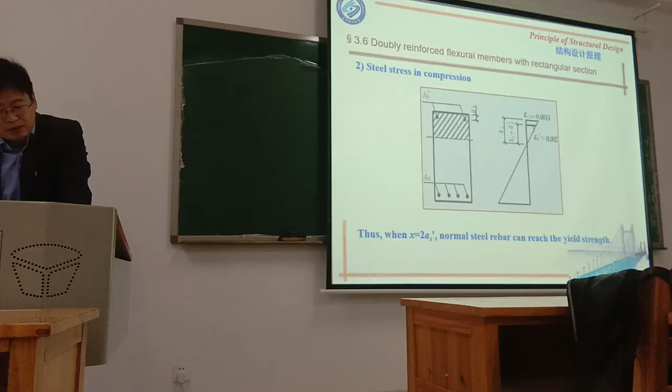This part is the double reinforcement. For the double reinforced member, the basic formula is similar to the single reinforced member. The only difference is we add this part, FSD prime, AS prime, and all inputs in these three equations.

We all found it with D, AS, or capital AS, or AS prime. Basically it is the same. As long as you remember this figure, the tension force is the same: FSD AS. FSD AS. So this figure is wrong, some symbol is a mistake.

So T is FSD AS. And for the compression force, we got two parts. One part is FCD BX, H0 minus half X. This is the same as single reinforcement.

Another part is borne by the reinforcement in the compression zone. This part is FSD prime AS prime, H0 minus AS prime. H0 minus AS prime is the arm for this compression force. The compression force borne by the reinforcement in the compression zone is FSD AS prime, this part, also FSD AS prime.

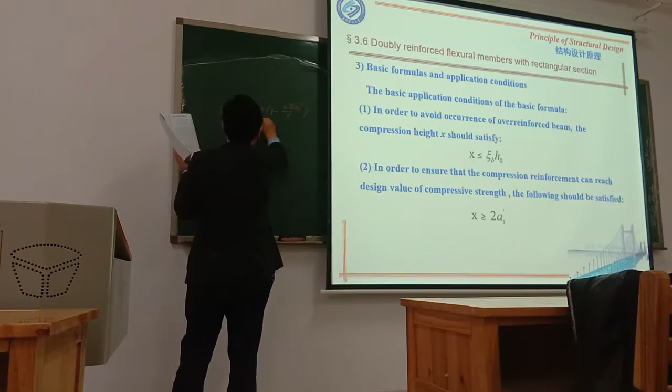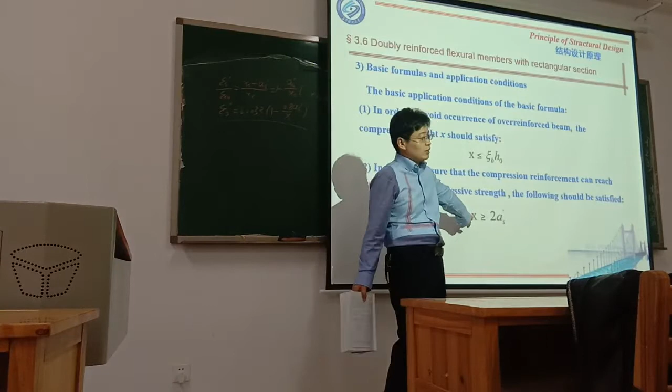So see this equation, and remember why we say x should be larger than 2 times AS prime. Why? Why do we say x should be larger than 2 times AS prime? Do you remember?

In order to make sure the compression reinforcement approximately reaches the yield strength, we need x larger than 2 times AS prime. So why x larger than 2 times AS prime? So that the reinforcement in the compression zone can reach the yield strength.

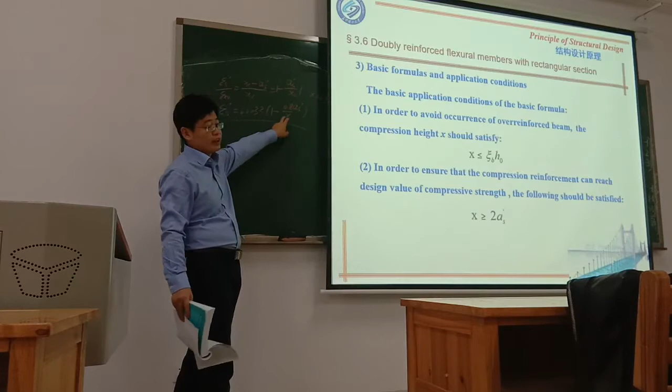The compression, from this figure, we use epsilon s equals 2 AS prime as prime, because maybe the compression hasn't reached yielding strength. So in this figure, if you replace x by 2 times AS prime, then finally you get the result. That's the reason why we say x should be larger than 2 times AS dash prime. Once x is larger than this, then the result of epsilon S prime will be larger than this one.

And also you should know the yield strain of the steel reinforcement is 0.002. Once this strain, the strain of the reinforcement in compression, reaches 0.002, that means the reinforcement reaches the yield strength. The yield strength, this strain is stress.

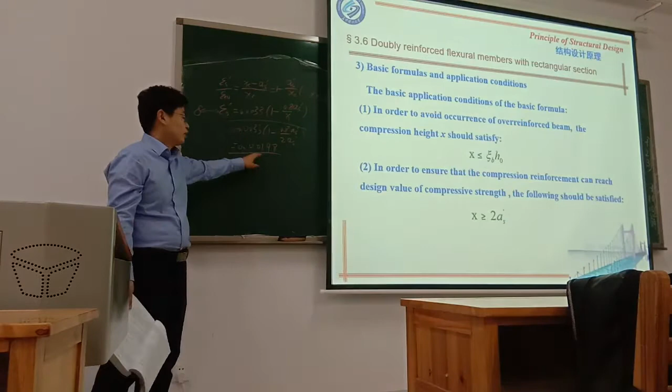When the yield strain is reached, then the stress and strain relationship holds. So when the strain reaches this level, that means the reinforcement reaches the yield strength. So that's why we require x larger than this, smaller than xi b H0 - the same as single reinforcement - and this one larger than 2 times AS dash prime, for the reinforcement in the compression zone, making sure it is fully used, reaching the yield strength.

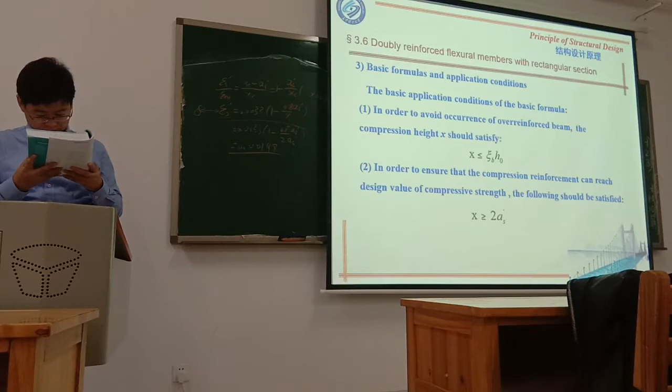So we see the calculation method in this picture. I think they give you the figure from the book, 6A, the calculation method. So for this double reinforcement beam,

normally we also have two cases we need to discuss, as shown in figure 3-27. In this case, we are asked to solve for the tension reinforcement AS and the compression reinforcement AS prime.

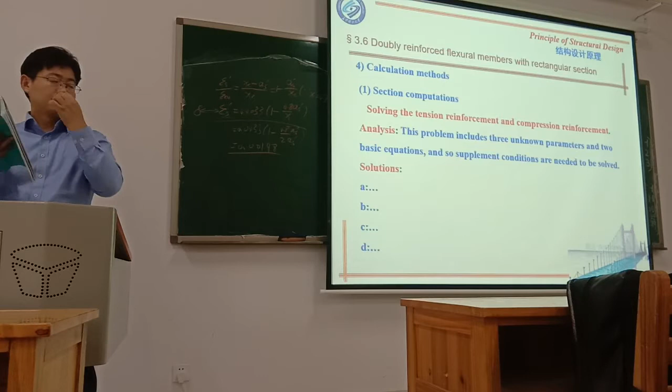Which page was it, 6A? 6A. So for the calculation of this double reinforcement beam, you see this, 6A. So in this question, we need to calculate the tension reinforcement AS and the compression reinforcement AS prime. That means both reinforcements are unknown.

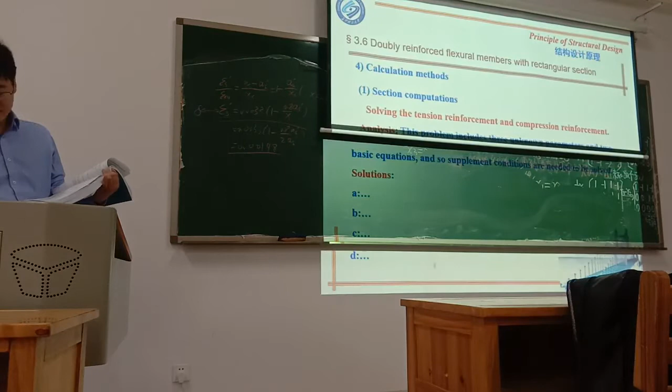Hey, maybe we can just turn it on. Yes, you're right, but it doesn't matter. That's good. Okay, we see this.

So for this case, double reinforcement beam, it asks you to calculate AS and AS prime. Of course, it tells you the moment and the dimension. So it just asks you to design how much we should put inside. So how to do this question? Let's see the solution.

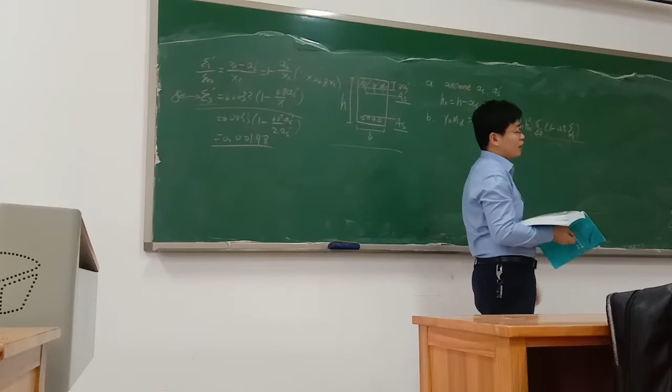Yeah, so this fcd bx, fcd bx plus, so mu equals this. This equation is the basic equation for the single reinforcement beam.

And we use the boundary condition, the boundary height x equal to ξb h0. Then, using this equation with the boundary condition, we get the largest resist moment of the single reinforcement beam. If this moment is still smaller than the moment induced by the load, that means the single reinforcement beam is not strong enough.

We have to use a double reinforcement beam. So this is step B. Step C: you see in the book, they say we make AS plus AS prime more economical, because you have many choices. You have to find the more economical choice. How do we make this more economical?

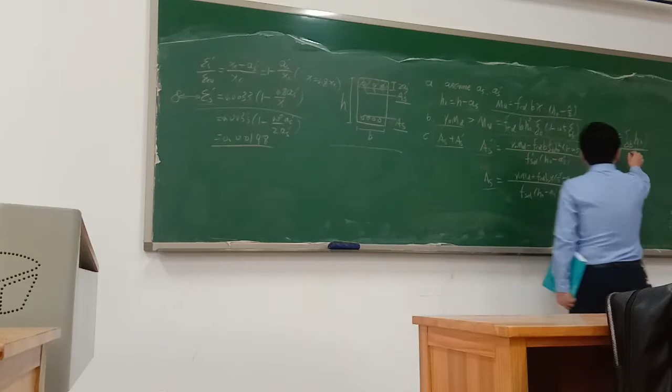If AS becomes big, meaning AS prime will be smaller. If AS is big, meaning AS prime will be small. Yeah, if we use x equal to ξb h0, this result AS prime is the most economical result, and it means the tensile reinforcement has been fully used.

And can you see how we got this? Why can we write the equation like this? Just see the basic equation 3 dash, 3 to 23a.

Six seven page. The equation is 3 to 23a, 3 to 23b. Say AS prime and AS, because in this equation we just replace x by ξb h0. Then you can get the result AS prime and AS. So that's why we got this equation. So till here we have calculated the AS and the AS prime.

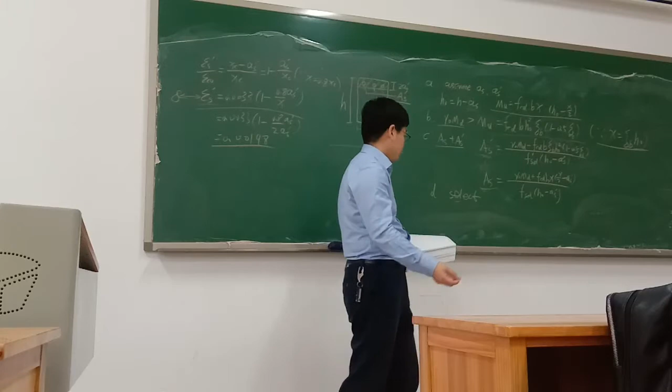Select the diameter and the number for the steel bar. Then, as you have determined which part of the steel, you draw the arrangement. So 1 layer or 2 layers. Well, after this, we go to the next step: check.

This part is the calculation, so this question. After you have determined how to arrange your reinforcement, then you need to check if this design is okay or not. Because in this calculation, you assume some value, and this result is the theoretical result.

Once you have determined the diameter and number of the steel bar used, then you will go to the real AS, X, A prime, and this area of the reinforcement. Then you need to use this real value to check the construction requirement and the moment, the resistor moment, MU.

If MU is larger than gamma 0 MD, if this is satisfied, that means your design is okay. And otherwise, you need to go back and change the value and calculate again.

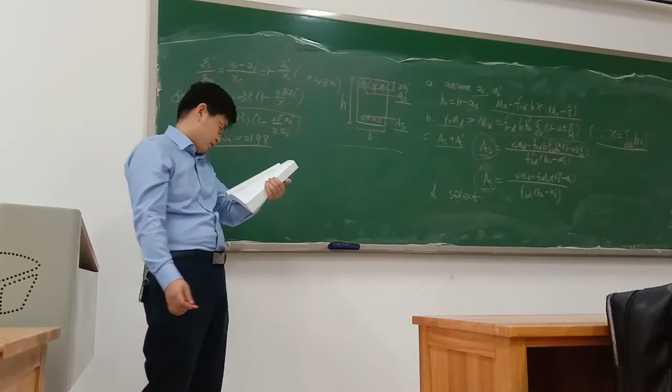At this situation, you just assume AS, and then for the basic formula, say x, you can calculate x equal to h0 minus this. Check if x is smaller than ξb h0. If satisfied, good; if not satisfied, you need to modify the design. So this solution is easy.

So meaning 69 page, to see this equation. 69 is for this situation. Everything I told you includes AS prime, only asking you to calculate AS. Yeah, so how to calculate it? It's a little bit different from this situation.

At this situation, AS prime and AS, you also need to solve. These two you don't know. And this solution can give you AS prime. So what's the difference? The step is different.

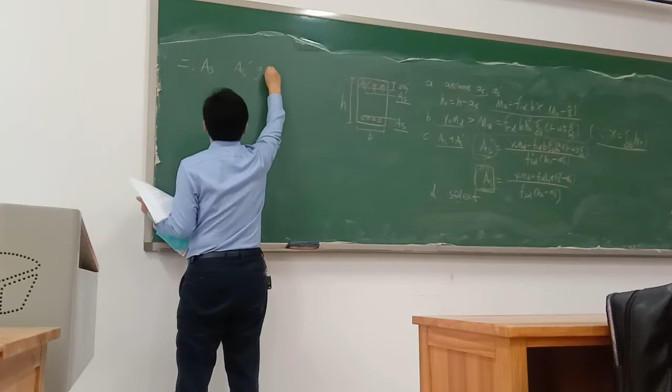So this result—do you know how we got this result? Then from this one.

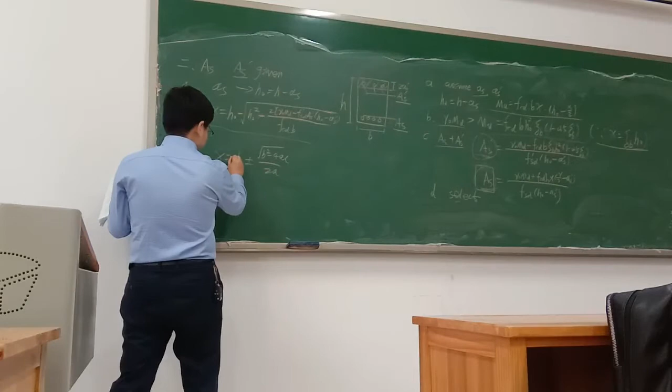Is this minus b? Is it? Yes, minus b, I remember it's minus b.

When you check this, it's a little bit mixed. So this is the result, this is the condition. Give you as prime, ask you to calculate as.

First step, assume as got h0. Second step, use the basic formulation to get x. Once you get x, then we check if x smaller than ξb h0.

If this is not satisfied, that means your design is over-reinforced. It's not good. You need to modify the design.

And then let's see if x satisfy this, then we can get AS, use the basic equation, the first equation.

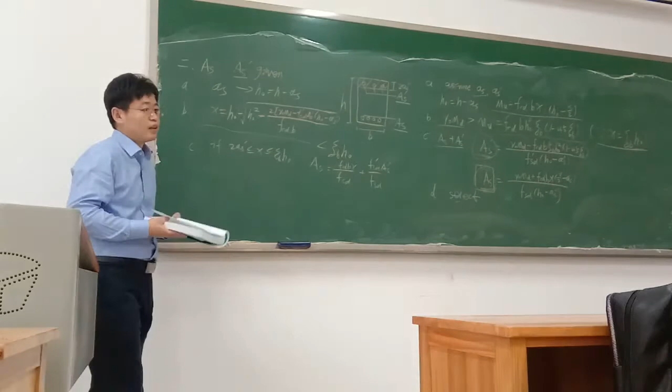Use the first equation, 3 to 22. And there is minus b.

The quadratic equation, wait a minute. The quadratic equation, it is minus b. X equal to minus b, minus b plus... No, the quadratic equation, you were asking whether maybe there is minus. You just let us remove them. Yes, it's minus.

Okay, anyway, you know how we got this result. Let's use the basic equation.

And then once we check x smaller than ξb h0, then the first step, let's see, we use the basic equation to get AS.

So no problem with this, it's easy. When will be given the AS prime and we have to calculate AS, right? Yeah.

So in this situation, AS prime and AS we all know, then both AS and AS prime we need to assume. And in this situation, AS prime given, we only need to assume AS.

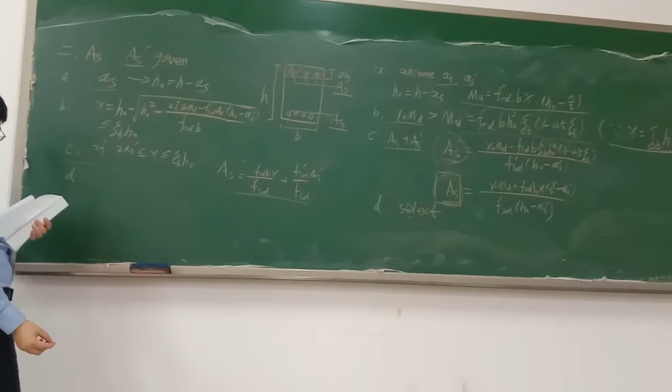And then step D, another situation, if x smaller than 2 AS dash, so x smaller than 2 times AS prime, what does that mean? We ask for x larger than 2 times AS prime. If x is smaller than this, what's this meaning? What's the meaning?

Yes, this is the realistic case, that's our problem. So that means the reinforcement in the compression zone has not reached yield strength. The function has not been fully used. Yeah, so at this situation...

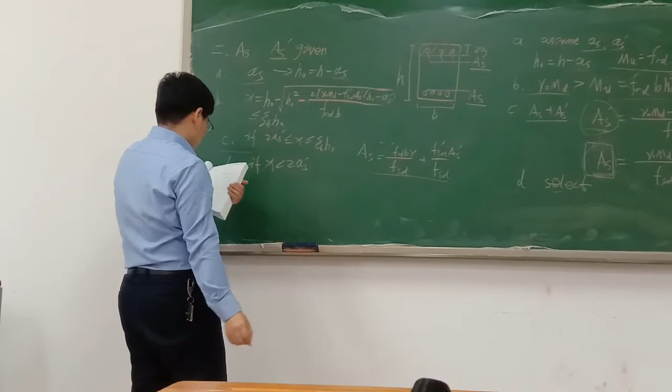We need to calculate the AS. If x is smaller than this value, we normally use x equal to 2 times AS prime, and then by this value we can get AS equal to gamma 0 Md divided by fsd, h0 minus AS prime.

AS equal to this line. You know what, from the formula. Which formula we use?

3, yeah, 3 to 23. Yes. A or B? A or B? No, no, A, A. You sure it's A? Yes, yes.

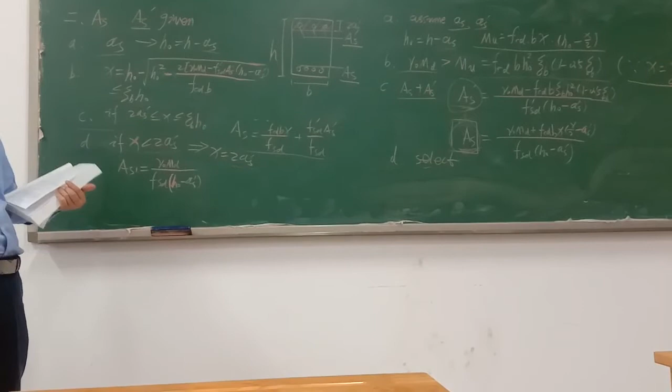Of course it's not, because the second one is 2 AS prime. So of course we use 3 to 23B. Yes, because we use this, then the first part becomes 0. Half x minus AS dash equal to 0. Then we got this.

And another step, we calculate for the single reinforcement section, AS dash is not considered in the equation. So that means taking AS prime equal to 0. Then we got another AS equal to...

FSD, FCD, BX. Then we compare this, we use the minimum value of AS1, AS2.

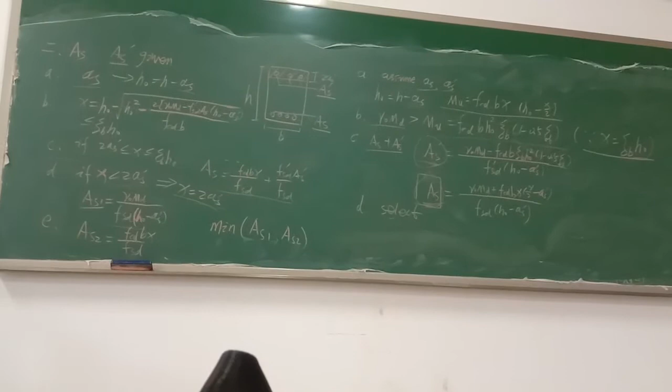The following part is to check your design. So the first part is to check section check. Section check, okay.

So the main purpose is to calculate MU, the resisting moment, resist loading capacity, to check MU if MU is larger than gamma 0 MD. So once you finish your design, you determine the diameter of reinforcement and the number of reinforcement, then you can calculate the real resistance force, MU.

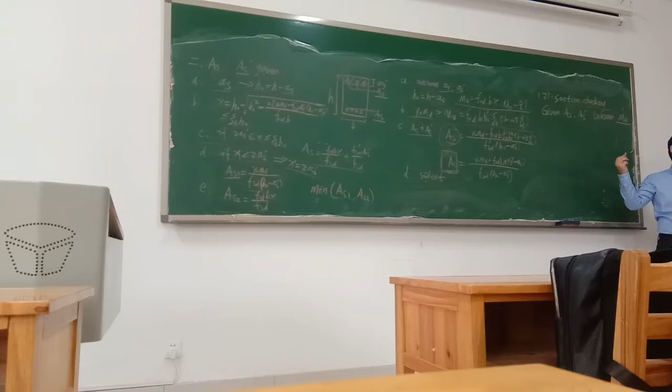So now we need to check if MU satisfies the requirement or not. So this way you check AS and AS prime, you'll also use this equation. You can just use the basic equation to calculate MU directly. But for this...

So in our book, it tells you how to do it. If x smaller than, if x smaller than 2 times AS prime, that means the reinforcement in compression has not reached the yield strength. So at this situation, we just make it simple.

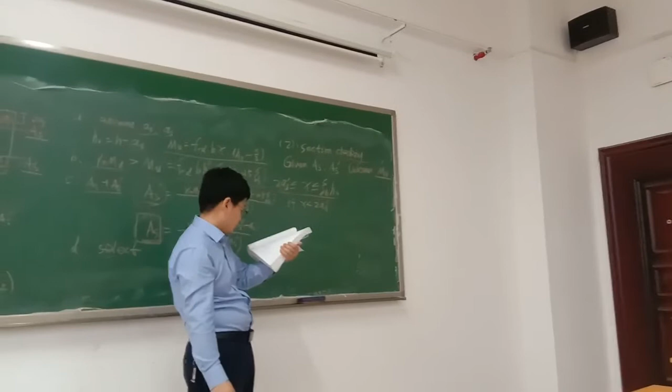So how we got this mu? I find it, we take it from the formula 3.

To 23p, yeah, 3-23B. We just use x equal to 2 times as dash. Then the formula, the first part is equal to 0. Then we can go to mu.

So if x is smaller than this, then we can use the maximum value 2 times as. So the result is, because it is smaller than this value, this mu, this value will be the largest, the maximum resistant force of this condition.

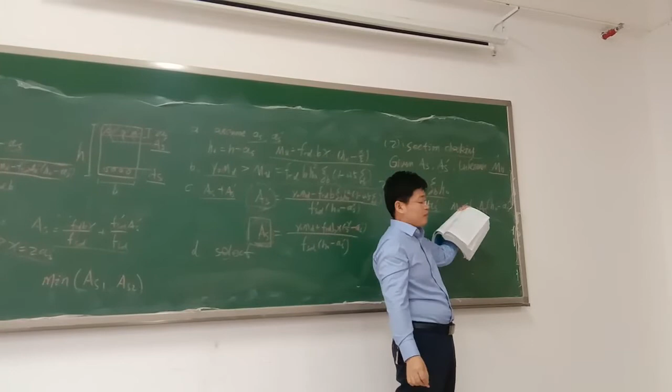Normally, for this condition, mu should be smaller than this actually. Then we use this boundary condition. This mu is the maximum value for this condition can get.

Any question for this?

So another situation, if x larger than the ξb h0, that means your design is over reinforcement. So for over reinforcement, how we calculate? One selection is to change your design, to make your design appropriate reinforcement.

Another selection is just calculate the mu, use x equal to ξb h0. Understand?

If x large, that means it is over reinforcement. Some of the reinforcement are not fully used. It cannot reach the yield strength.

Then we use this value x using boundary condition where we calculate this force.

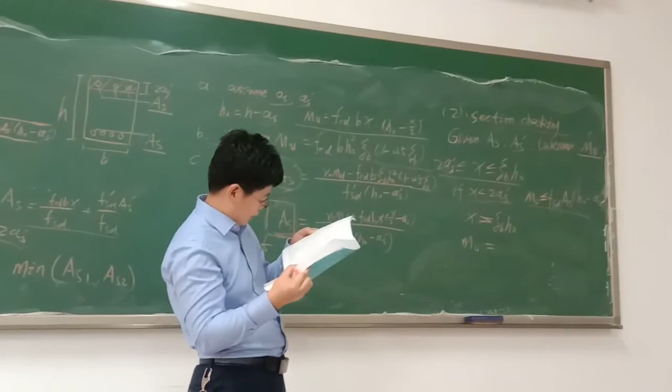They didn't. They just said you use the basic formula. Oh yeah, you in the second page, the 5 step.

And for this condition, actually, your book tells another part. Once we got this, and also we use the singly reinforced rectangular section calculation the MU. This we call MU1 and MU2.

Use fcd b x h0 minus x. This is the MU calculated by the single reinforcement beam.

Suppose this beam is a single reinforcement. Don't care about the reinforcement. Don't care about this. Just use As to calculation. Then compare these two. Take the largest one. And max, use the max.

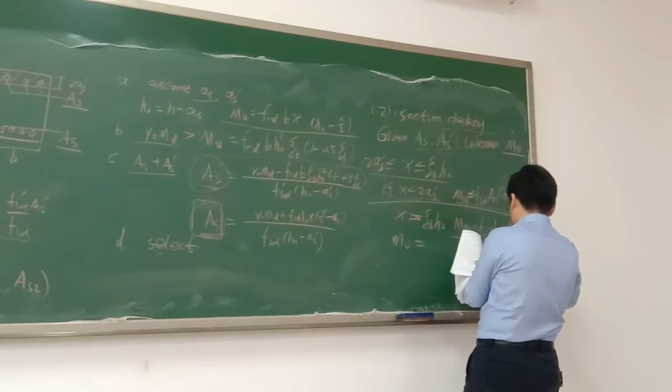So this part is the section check of the double reinforcement beam. That means once you got this As, As prime, we need to check this design if it's okay or not. That means we need to calculate MU to resist force.

If this resist force is larger than the external force, then for the best situation, x in this range, then we can use the formula basic equation directly to calculate MU.

If x smaller than 2 times AS prime, then we can use x equal to 2 times as prime, got this MU1, and then we use the single reinforcement beam equation. We can get this MU2 and compare these two, we can take the larger one.

And for the situation x larger than ξb h0, it is over reinforcement beam, then we just take x equal to ξb h0, use the basic equation to calculate MU. Or another choice, you change your design to make its x smaller than the ξb h0.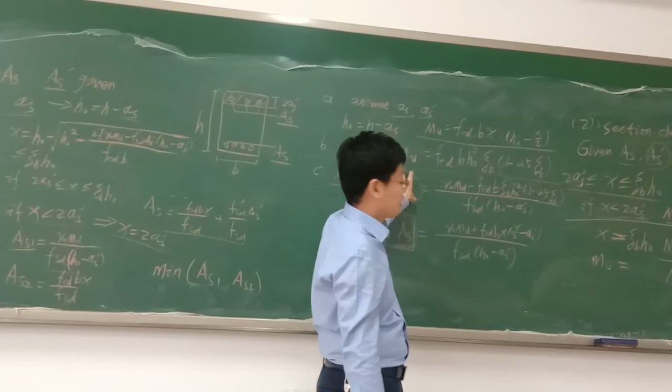And for this situation, AS prime I give to you and ask you to calculate AS. We also like this, assume AS. Assume AS, we got H0. Once you got H0, you can use the basic equation, the product equation, to get this result x.

And then, based on the value x, if x satisfies this condition, you just use the basic equation to get AS. If x is smaller than this, we got two values and then use the minimum value. Say if x is smaller, normally we use x equal to this one. Okay, this is for the double reinforcement beam. We calculated this one, this two, we got this minimum AS.

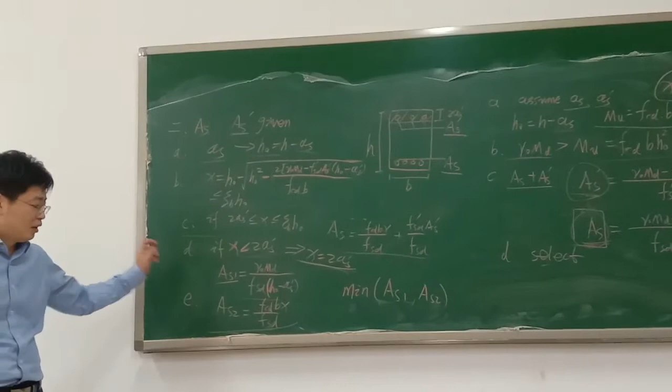And also for this situation, we can find if x is larger than this one, that means it's an over-reinforcement. Actually, normally you need to change your design. Or we use this, same thing, use this x equal to ξb h0 to calculation. But it's new - normally, if you find x is larger than ξb h0, that means your design is not good. You better go back and change your size, change the material, something like that to make x smaller than ξb h0.

So this is the basic equation. Now if you close your eyes and think about this condition, for this solution asks you to calculate AS and AS prime. So think about how to do it step by step. And for this solution, think one by one step. Can you just remember, if you don't see this, can you remember how to do this?

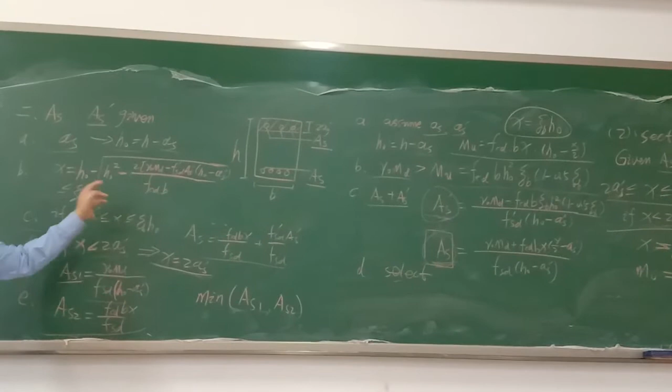Yeah, a bit. Now see, this one is when we don't know AS and AS prime. But this one is when we know AS prime, and we don't know AS. It's different, you see. In this we calculate x. In this we calculate mu. So that's the difference.

So now we remember it. Okay, I give you some homework.

He has already taken it. He'll put it inside the group. Okay, is your job.

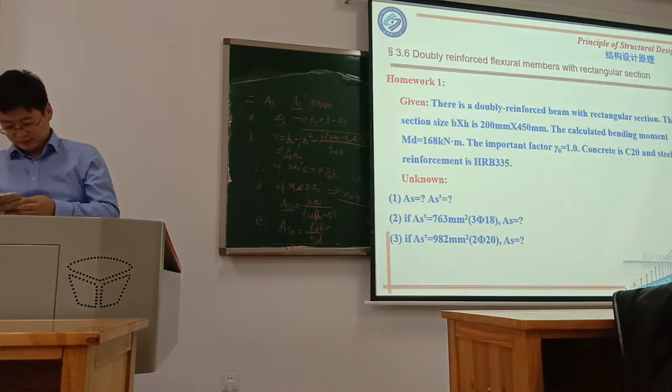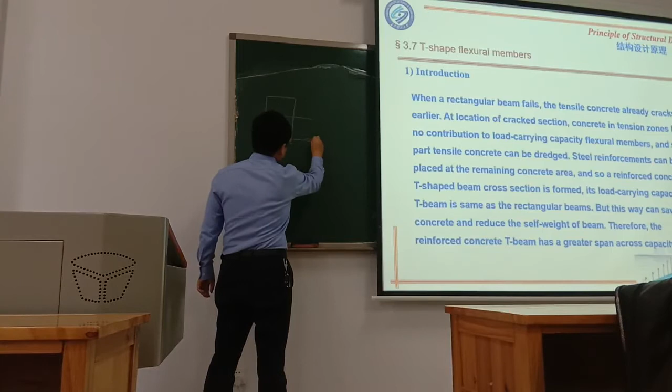For this rectangular beam, once the concrete cracks, actually this hard concrete is no longer used. The force we see, we just transfer to this reinforcement. So this hard concrete actually is of no use for the load carrying capacity. Then we try to remove it just like this, something like this. Then generally we get this T shape. Of course, as you go up, make this T more, because when the force increases, the compression area becomes smaller, something like this.

Then, compared with the rectangular shape, we just remove this part and put the reinforcement in the bottom. So the rib of this T beam, the main function is just to place the reinforcement. And the upper part, of course, is to resist the compression force. So from the rectangular shape to T beam shape, the resistance or the load carrying capacity actually has no change.

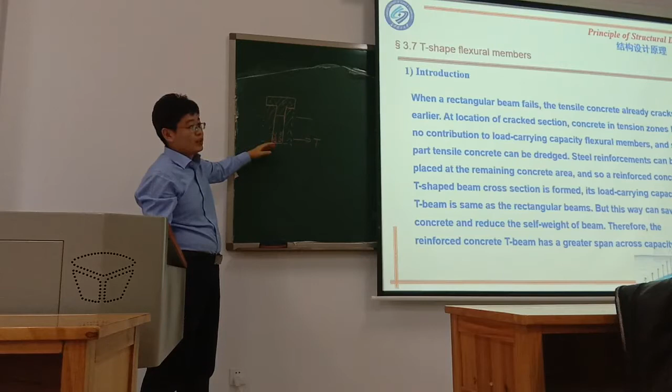Because the compression area is the same as the rectangular shape, and the reinforcement is the same. But we removed a lot of the concrete. That means the self-weight of the beam has been reduced greatly. Then the self-weight has been reduced, that means we can make the span longer, because we know normally nearly 90% of the loading capacity is used to resist the self-weight. If self-weight was reduced greatly, of course the span can be made longer. So that's why actually T-shape beam comes from rectangular shape. That's based on this load distribution, tensile force and compression force.

So for the normal T-shape, the tensile force is resisted by the reinforcement. The compression force is resisted by this part. Sometimes it's resisted only by this flange part, or sometimes it's plus the rib, part of the rib.

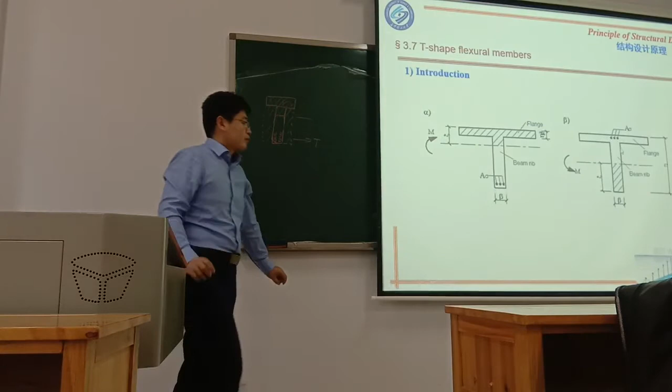And this is the inverse. The top is in tension and the bottom is in compression. This situation actually is just like the rectangular shape. No matter if the shape looks like T, suppose at the middle point of the continuous beam, the beam is bearing negative moment. The up part is in tension, the lower part is in compression.

If you use this T-shaped beam, then the up part is in tension. The tension force is resisted by the reinforcement, and the lower part is in compression. The rib is bearing the compression force.

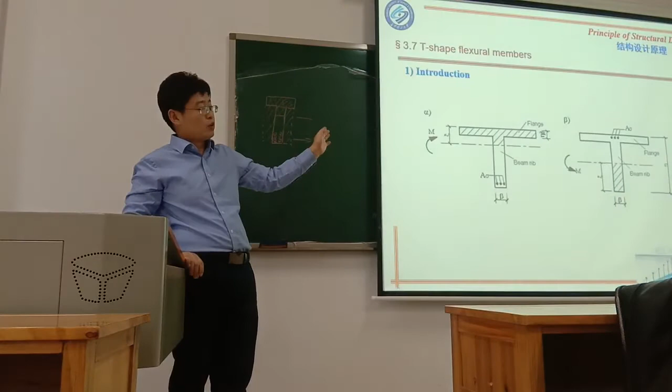Actually, this flange, once the crack occurred, the concrete of this part - we just neglect the tensile force borne by the concrete. It's very small, and we treat it as all the tensile force transferred to this reinforcement. So for this solution, actually it's just like a rectangular beam. No matter if it looks like a T-shape or not, it actually works as rectangular.

So for this solution, it's just like this. If we don't consider this part, this flange has no use actually for this situation. It just works like this rectangular shape. So also it looks like T shape, actually it works like the rectangular. The formulation is similar.

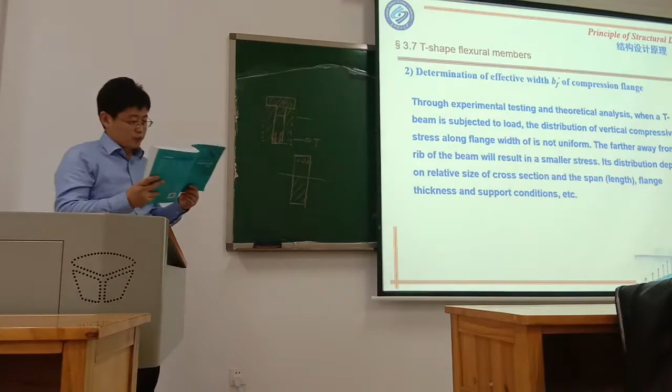So in your book, there's some content introduced about the equivalent shape, equivalent change of this shape. But this is very rarely used. Maybe we just introduce it a little bit since your book has talked about this. So in our book, we introduce this shape: plate with an empty hole.

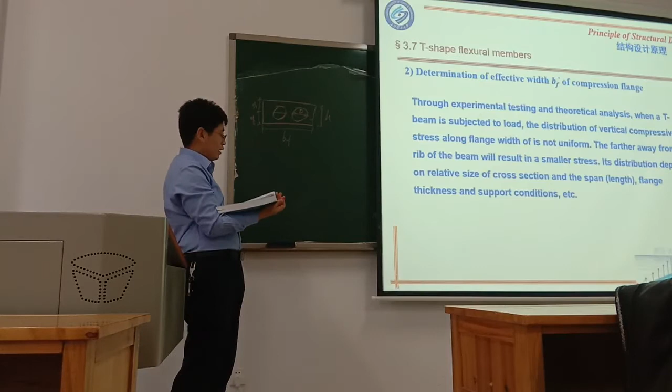So for this type of beam, this section is rectangular with two holes inside. It's not easy to calculate the force. So we try to think to make an equivalent shape. In our book, they make this equivalent, and finally they make this something like an I shape. So from this rectangle, the hollow, two hollow circles, and then to this shape, and to this shape - we call this equivalent. So how to make this equivalent cross section? Because this time it's easy calculation, but this one with the circle is a little bit complicated.

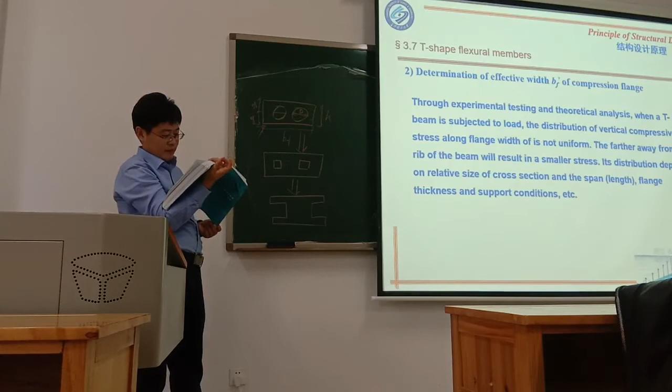So in order to use this section to replace this section, they make sure the area of this hole is the same, and the moment of inertia is the same. The equivalent area and the equivalent moment of inertia. Besides this,

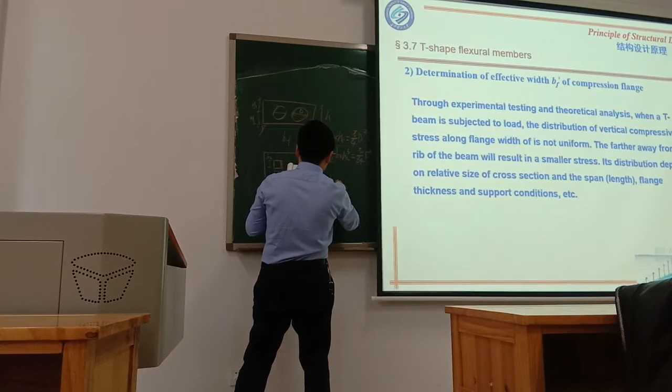So by these two formulas, we got this: HK equal to, BK equal to, then finally I got this. So the basic principle is if the area is the same and the moment of inertia is the same, then we can change this section to this section.

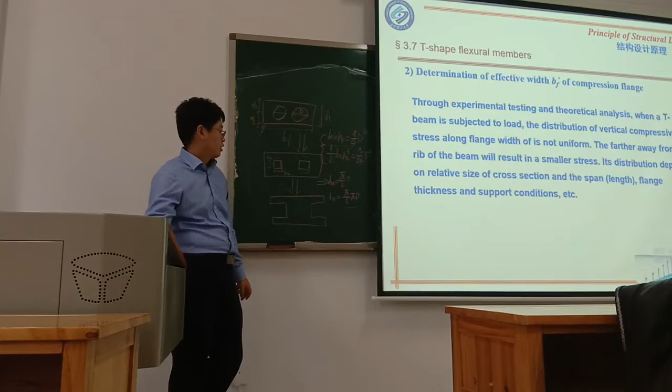This area was like BK HK equal to the area of this circle. And this moment of inertia, this formulation, for this rectangular shape or square shape, the moment of inertia - this equation is one big equation in your material mechanics.

So this was a small part in the content of your book. It just introduces the equivalent section, how to calculate the equivalent section.

So why do we transfer this section to this section? Because for this section, the calculation we can use the T shape or rectangle shape equation to calculate the loading capacity, the moment of mass. But for this, it's a little bit difficult - it's circle. So for the height or for the effective height, H0 or AS, it's very difficult to calculate. It's not uniform. So for this shape, it's uniform distribution. So we can use this shape to calculate the loading capacity for this - use this equivalent shape to calculate this part.

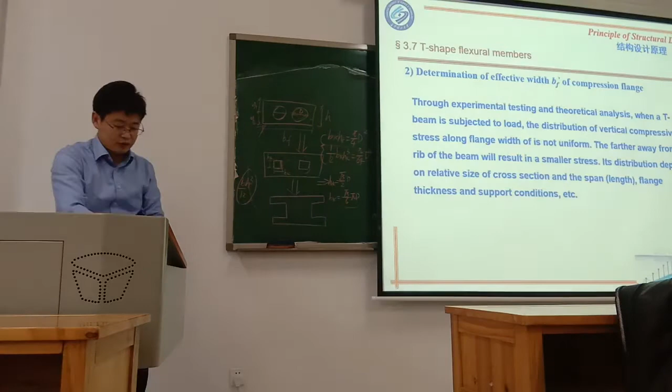So that's why we use this equivalent section for this circle section. So another content in our book is the determination of the effective width BF prime for the compression flange. So why do we introduce this? Because for the real situation, for this T-beam, the up part is in compression, but the real distribution of the compression actually is like this.

So that means the compression stress is not uniform along this flange. So if you want to calculate the real compression force, it's not a little bit difficult, it's very difficult. Just like this.

For the rectangle shape, we see the real distribution is like a circle. But for this flange, in the y direction, the distribution is also near the rib. The compression force is larger there. Going toward the edge of the flange, the compression force generally decreases. Imagine it's T-shaped, and if you bend it, at the side the force is smaller, in the middle the force is larger. So it's not a uniform distribution.

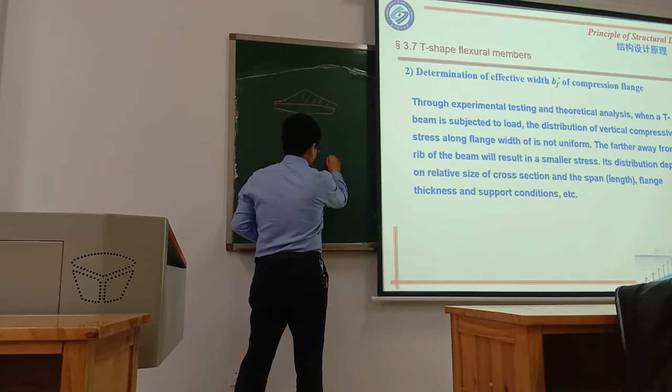But for this curve, if you want to get the compression force, you need to use integration. It's difficult. So for project use, we want to make it easy. Normally, for this top shape, remember we use this equivalent rectangular stress block. And for this, we also make an equivalent width BF, to make this value equal to the real distribution value, just to make the calculation simple. So now the question is how to calculate BF. BF, in your book, is BF prime, something like that.

So this curve is the real actual stress distribution. Now we want to get this equivalent width BF prime, using this rectangular shape to replace the real distribution, keeping the total force the same but making the calculation simple. Now the question is how to take this BF prime, how to calculate it. This flange effective width, in the design calculation, you want to facilitate the calculation according to the principle of equivalent force. Equivalent force means the action point and the total value of the force keep unchanged.

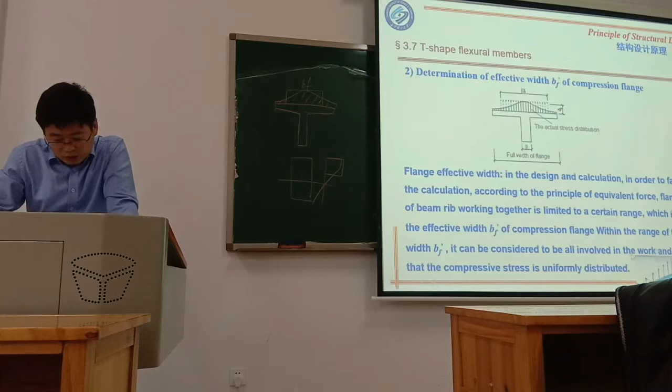So the flange width of the beam working together is limited to a certain range, which is called the effective width BF prime of the compression flange. Within the range of the flange, it can be considered to be all involved in the work, assuming the compression stress is uniformly distributed.

I didn't put this in the PowerPoint, but in our book there are 3 different situations introduced, according to the code. See your book, page 72. The first situation: for a simply supported beam, 1/3 span is used. So if the bridge or structure is simply supported, then 1/3 span is used. What's the meaning of 1/3 span?

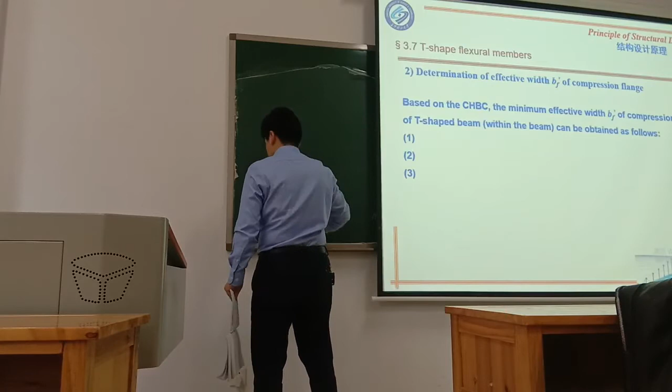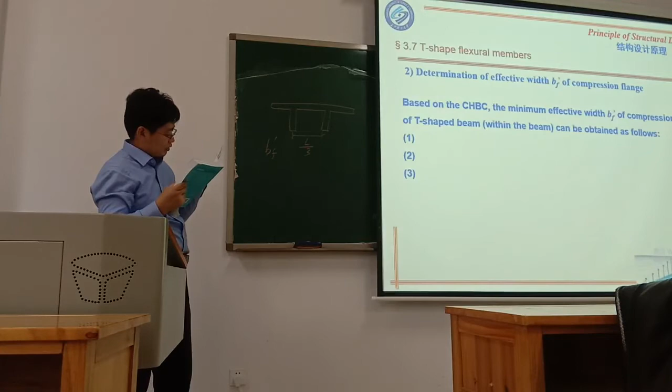The second situation is the average distance between two adjacent beams. Use this way. Or the third situation: B plus 2BH plus 12HF prime. See your figure 3-31. BH and HF prime have different meanings.

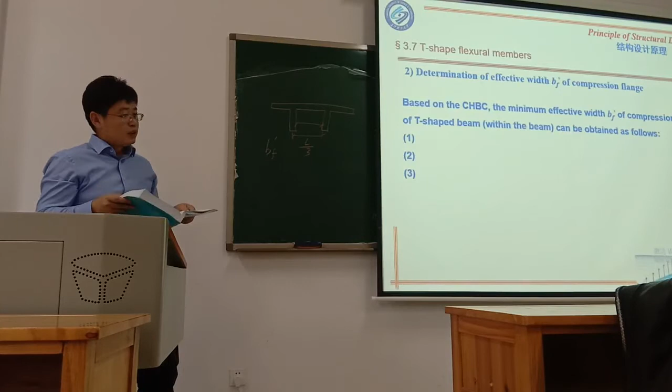So different conditions can use different values to calculate this BF prime. In your book, it tells you three different situations, and you can calculate BF according to this. So we see the basic calculation formula and application conditions for the T-shaped beam.

For this T-shaped section, it can mainly be divided into 2 categories based on the height of the compression zone. One is when the compression area is within the flange thickness, just like this, only in the flange, the plate in compression. Another situation is not only the flange but also the rib, where part of the rib is in compression. If only the flange is in compression, the tensile force is resisted by the reinforcement.

So you see this situation is just like this rectangular shape. So this type of T shape actually works as one type of the rectangular shape. But if the rib is in the compression zone, the compression area is basically the shadowed region, so it's different from the rectangular shape. So that's the two differences. This type of T shape really works as a T shape, but this other type actually works as a rectangular shape. So it's not just about whether it looks like a T shape or a rectangle.

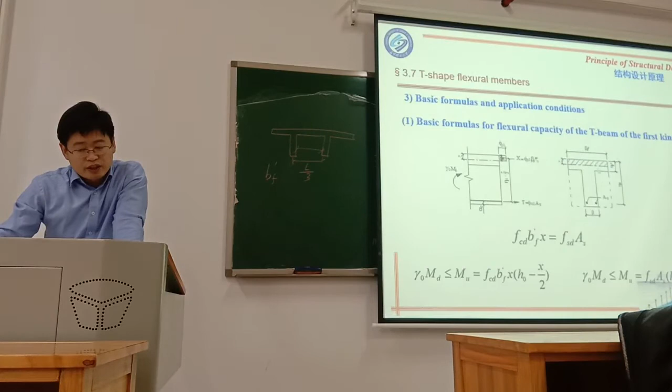So this is the basic equation for the first kind of T shape. The compression area is just in the flange. And for the second type, if not only the flange but also the rib is in compression, then the equation is a little bit different.

Just because the compression force includes not only this part but also this part. If we suppose this height is x, then C1 equals FCD times B, times x. So this figure has some wrong symbols. If this part is in compression, this is BF.

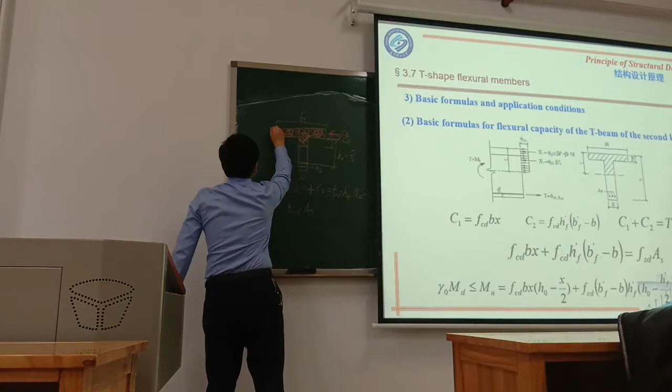So this part is C1, and C2 is here. The arm of C2 is larger: H0 minus half HF prime, because HF prime is the height of the flange.

So for these basic equations, you don't need to remember them. You just remember the figure, know the symbols for the different dimensions, then you can write it correctly.

So for this second part, we'll teach the basic equation: force balance, moment balance.

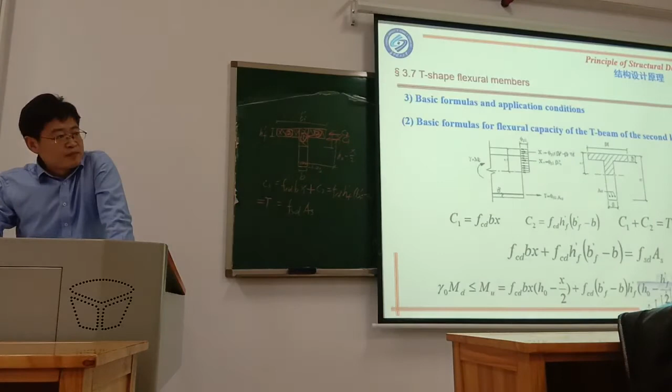Now you just close your eyes and think about this shape, every part. If you don't look at it, can you write out this formula? You can? Okay, go back there to write that. Write the moment balance.

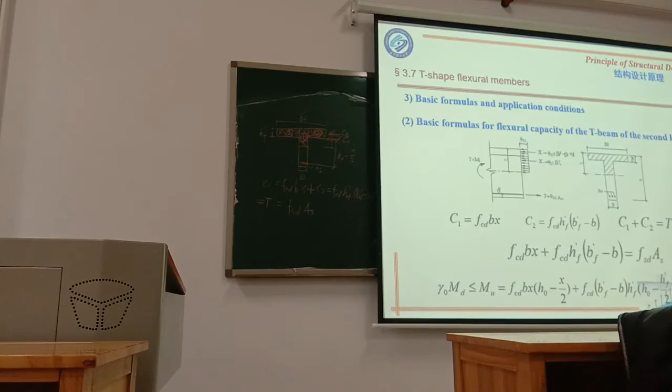Draw the figure first and write down HF prime.

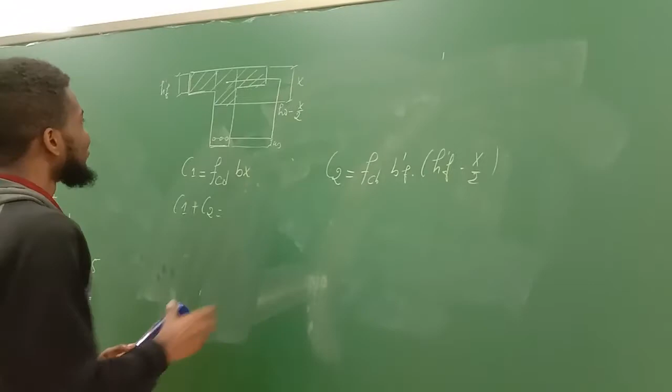This means, for this part 2, how do we calculate the area of part 2? The two side flanges, the flange, the B prime F area minus B. The area we think is this part and this part of part 2, two parts, up and down.

How to calculate the area of these two parts? We take HF as the height, and the width, this part B, the total B prime of F, BF prime, minus B, the B from the side. So that middle B will be minus, right?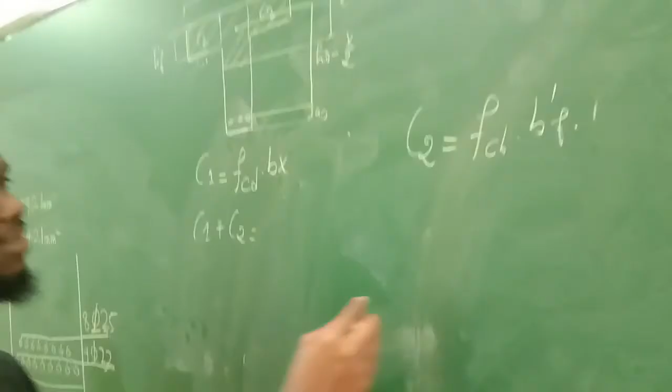So the area of these two parts, how to calculate? Do we take this one times this one? No, you won't multiply it. It will just be like you bring the bracket, and it will be B prime F minus B, times this, to make the balance of the moment.

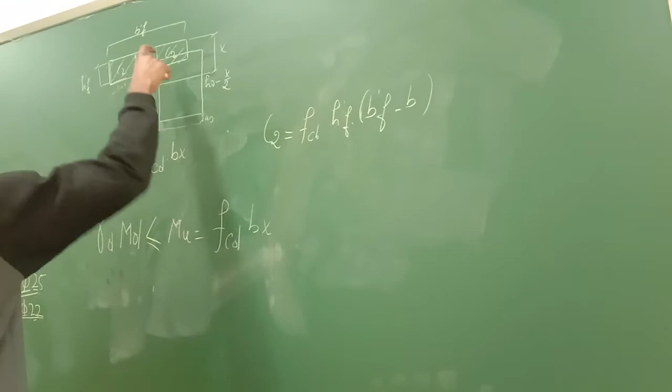So the arm of C1, the arm of C1 now is this one. And the arm of this one, the arm of C2, the arm of this one is this minus x. Okay, I know that here it should be minus. Here it should be... this from here is okay, X.

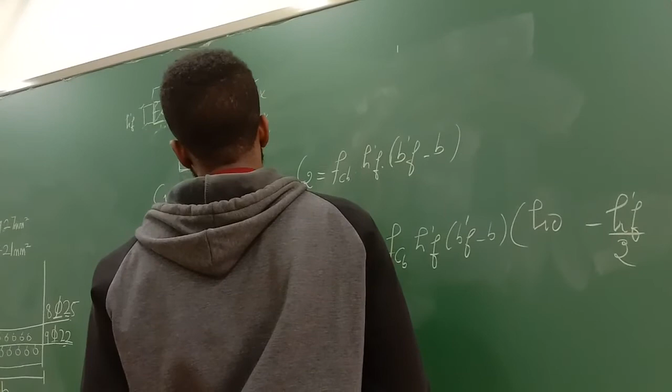No, it's right. Yeah, finally, right now. Yes, it is.

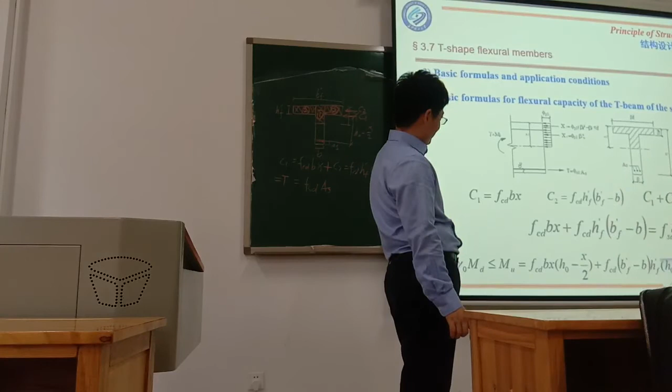So you have to write it yourself. Maybe you just remember it's not so deep. We have to write the first one, then the first one, we have to put, and the second one, the second line. We need only this one over this. So you think it's very simple, but when you write, you find it's not. That means we have to write this one and that one, this one first and second one. We have to memorize this. This one is great, yeah, this is simple, yes. Understand? So we agree? Okay, that's it.

Then we need to calculate AS. So how to calculate AS? Actually it's the same. If you do the solution, first step assume AS, so the effective height is the same as the rectangular shape. Normally in your book I told you different types of structure have different AS. You can use different values. You see in your book, page 74.

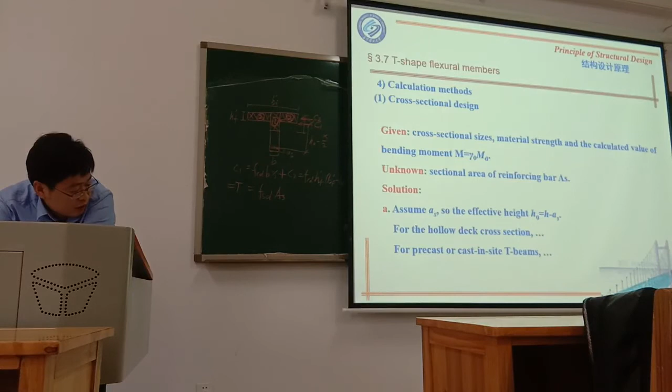Then the second step, determine the effective width of flange BF. So this is the difference with the rectangular shape. For T shape, we need to determine the effective width of flange BF prime. So how to determine this BF prime based on CHBC code? Three cases are considered to take the minimum value. So there are three conditions in your book, page 72. Three different conditions, you get different values, then choose the minimum one. So once you got BF prime, then the other step is to determine the type of the T shape.

You should determine whether the compression is just in the flange, or whether the rib is in compression or not. So just determine whether this part of the rib is in compression or in tension. If the rib is in tension, this means the compression area is just in this flange, so that means it belongs to the first kind, it works as the rectangular shape. If the compression is coming to this rib, then it's the second type of T shape. The equation is just now written there. So why do we need to determine the type of the T shape? Just because the basic equation is different. If it's just the flange, the equation is just like the rectangular shape, it's simple. If compression is in the rib, the equation is a little bit complicated. So the reason why we determine the shape, the type of the T shape, is just because the equation is different. So how do we determine whether it's type 1 or type 2?

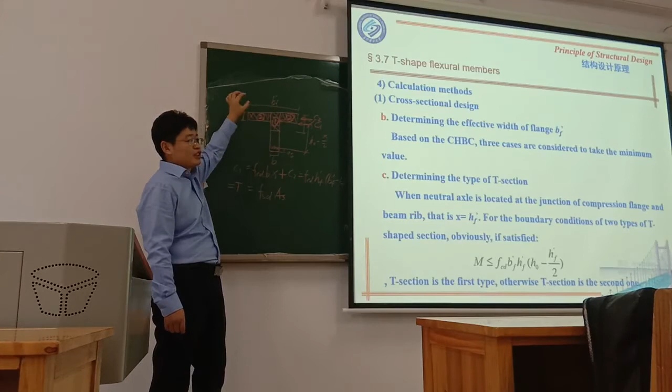If it's small, it's like type one. If MU is smaller than gamma 0 MD, that means only this flange in compression is not enough. Part of this rib also should be in compression. That's type 2.

If gamma MD is less than... if this MU is smaller than gamma MD, that one is type 2.

So you should understand it, not just remember it. So by this equation we determine whether it's type 1 or type 2, because the basic equation for type 1 and type 2 is different.

For the first kind, type 1, taking BF prime times H as a rectangular cross section, because type 1 actually works like a rectangular shape with width BF prime.

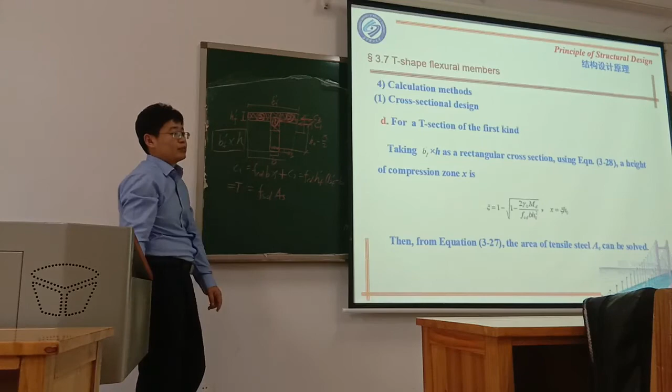It's just like this rectangular shape for type 1. Then the height of the compression zone, x, we can calculate it. Because for type 1, x is within the flange, so you need to calculate x. We got x equal to xi times h0. Xi equal to this - do you remember this equation? It's just for the rectangular single reinforcement shape, so we can use this equation to calculate x.

So once you got x, then you can use this equation. It's easy.

And for this second type, type 2, you also need to calculate x, but the difference is xi is different. What is the difference? This xi is the result of the quadratic equation, from this formula.

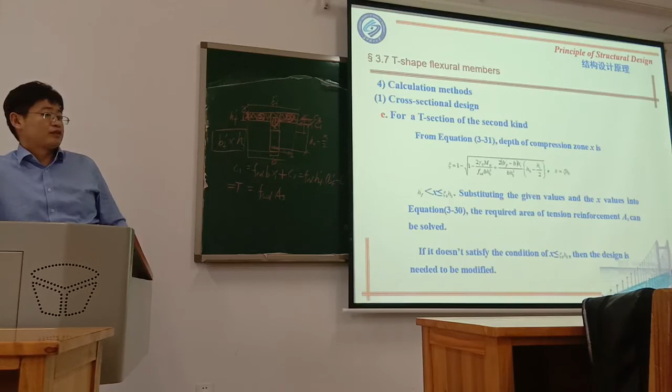So all the basic equations can only be used when x satisfies this requirement. If x is larger than ξb times h0, the basic equation is not useful, not satisfied. So this is the calculation, just like the rectangular shape - we need to check after calculating.

So the condition is: given cross-section area, tensor reinforcement layout, cross-section dimension, and material strength, calculate the cross-section flexural capacity - that means MU. Check whether the reinforcement layout satisfies the construction requirement, then determine the effective width BF prime of the flange, same as the calculation, and then judge the type of the T shape.

See, here is the difference from just now. Just now when we calculated, we used this equation to determine whether it's type 1 or type 2. Now we use this equation to determine whether it's type 1 or type 2. What's the difference?

This part is the tensor force, this part is the compression force. So if this compression force is smaller than this, that means it's not enough - it belongs to type 2. So here we compare by force, tensor force and compression force, whereas before we compared by moment.

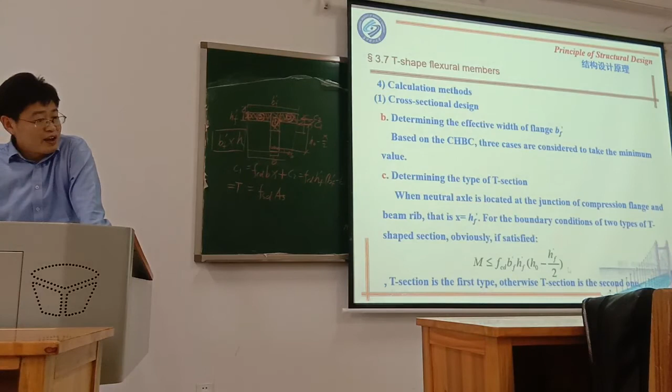Why here we don't use the force? Because here we don't know AS. But here we know AS, so we can use the force to determine whether it's type 1 or type 2. So that's the difference, it depends on that. At first, when we calculate it, we just know the compression force and the arms, then you can use this to compare with the moment, to determine whether it's type 1 or type 2.

But now, everything I told you is just to check it. You know the tensor force, you know the AS, that means you know the tensor force. Then you know this compression force, just compare this. If smaller than tensor force, that means flange in compression is not enough, part of this rib is also in compression, that belongs to type 2. So those are two different methods to determine whether it's type 2 or type 1.

So when is it type 1? It's easy, just start with the rectangular shape. And for type 2, the same thing. So this, all this basic equation, we need to use.

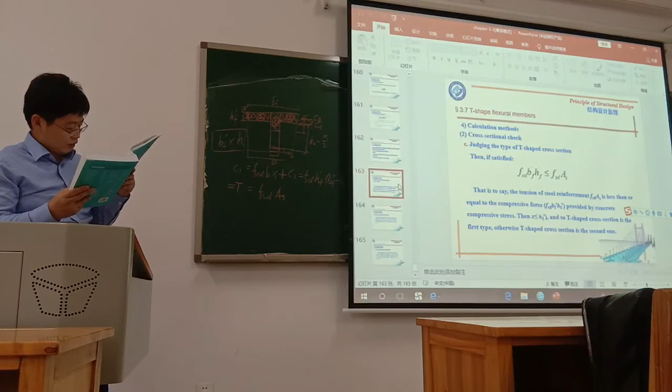But for this T shape, you see, for the time we got this example in our book. It's better to see this example, go through it to see. Because the equation, the basic equation is simple actually. Only by using it, you just do the calculation, then you can make one.

Actually, see in this equation what they wrote. That is to say, the tension of steel reinforcement, FS times AS, compared to this value. You just compare this one with this, compare these two. If this one is smaller than this one, that means it's type 1. If it is larger, it's type 2.

So in our book we got this example. We can change some values and make it as homework. See your book, see your book. The example: a prefabricated simply supported T-beam. Section height equals 1.3 meters. Effective width BF prime equals 1.6 meters. C40 concrete, HRB 335 steel bar.

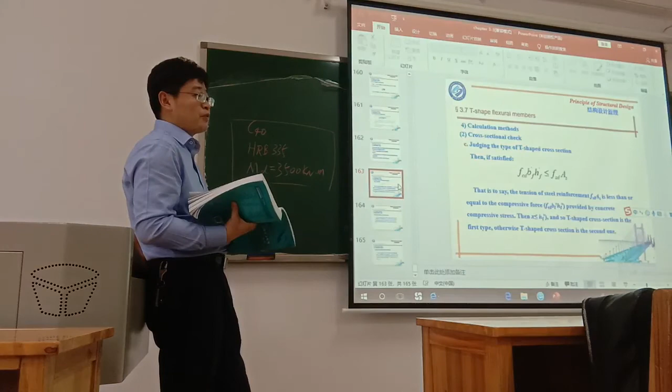You see this on page 74. AS normally, on page 74, at the end of the page, the lower part. Normally AS equals 30 millimeter plus 0.07 to 0.1. So normally, before we do the rectangular shape, we would assume AS equals 44, 45, something like this. But now you see, they assume AS equal to 125 millimeters.

Page 74, here, assume equal to this. So that's why they assume AS so large.

We have many layers of reinforcement normally. For this T-shaped beam you should notice: for a rectangular shape, this width B is wide enough, you can put a lot of reinforcement in one layer. But for this T shape, you see, this B is so small, you have to put it into lots of layers. So that means AS is much larger than in the rectangular case. Normally in rectangular, maybe just one or two layers; in T shape it could be 5 or 6, even 6 layers. So that's the difference, why the AS is larger. Because they use AS equal to 30 plus 0.07 or 0.1 each, see, each layer.